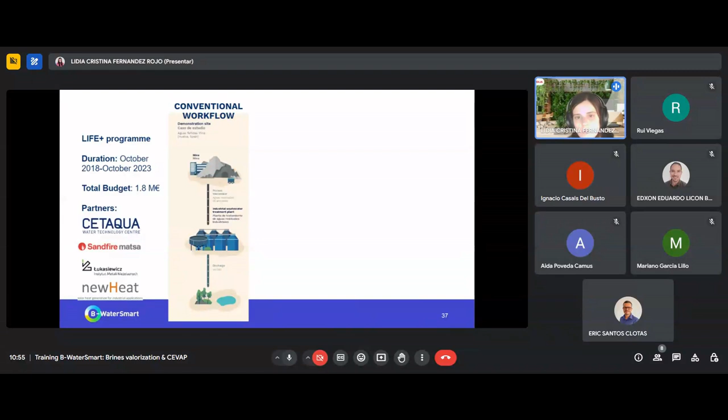With Remine Water, we wanted to change this linear process to a circular process. How? By installing an advanced treatment plant that treated the discharge from the wastewater treatment plant to minimize the brines going to the environment and to recover water to be reintroduced in the production process.

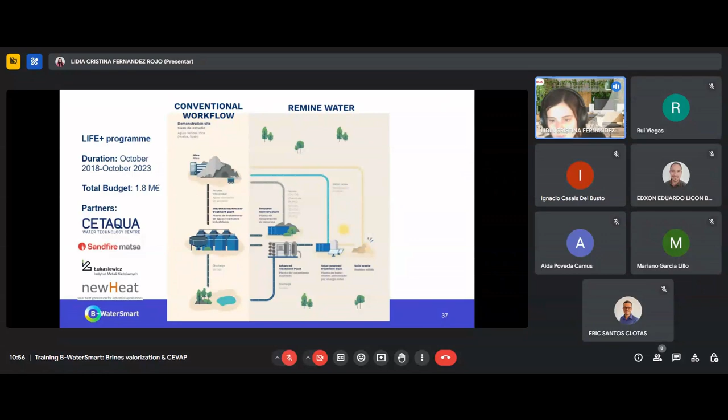In addition, in this project we also constructed another plant called the resource recovery plant, which has the objective of recovering metals and sulfuric acid, also from waste dumps, to be reintroduced into the process. Since this is not devoted to brine minimization, I will not go into detail on this part, but I wanted to mention it just so you know, in case you are interested, that this other part was also developed under this project.

So in the conventional workflow, the MATSA wastewater treatment plant follows this route. First, MATSA treats their acidic water, which had a pH of between 2 and 3, with a high sulfate concentration as well as high chemical oxygen demand amounts. The first step consisted of a Fenton process where the thiosalts were oxidized by means of the addition of hydrogen peroxide.

Then there was a second step where sulfate precipitates by means of lime addition and sodium aluminate. The sulfates here precipitated as gypsum and ettringite. Then the water was treated and stored in a buffer pond before being discharged into the environment.

The point here is that in addition to the high amount of water they were discharging to the environment that was not valorized, there was also the problem of the quality of the water being discharged. In this case, their sulfate concentration was still high, about 1,900 ppm, and in the near future they will have to lower this value down to 900 ppm.

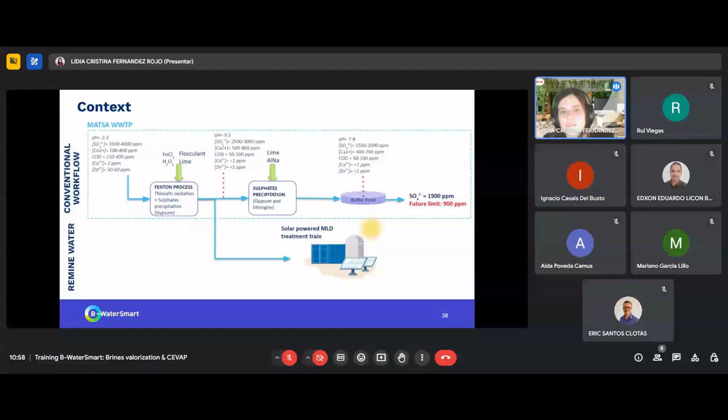So in the project, what we treated is the water that went out of the Fenton process. So it's already neutralized water with a lower amount of chemical oxygen demand, but still high concentrations of sulfates.

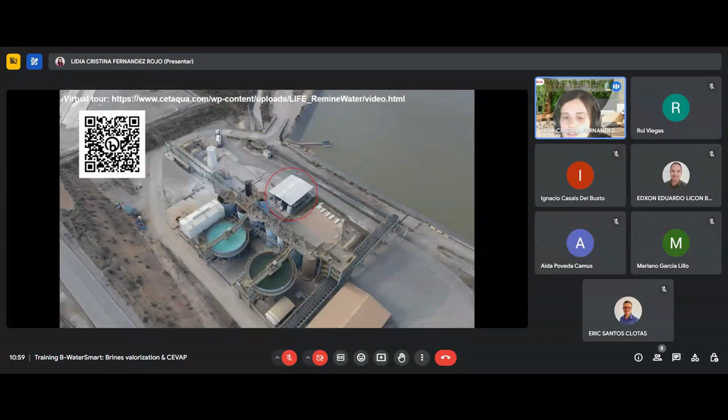Here you can have a full view of the MATSA wastewater treatment plant, and inside the red circle there is the Remine Water pilot plant that was built. If you follow this QR code, you can also have a virtual tour of this plant, available on the Remine Water project website, where you can go into detail on the technologies that have been tested.

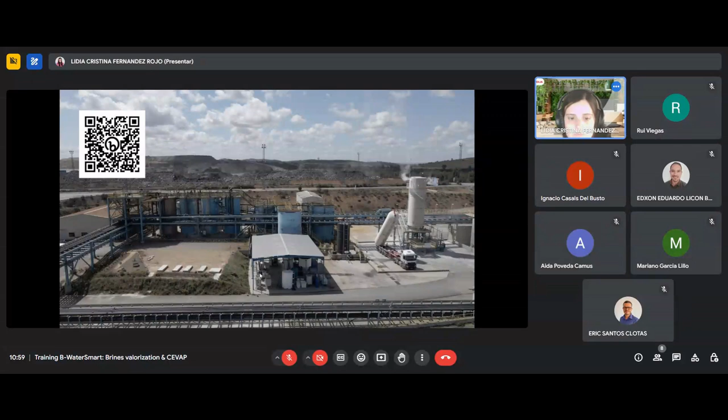This is another view of the pilot site. In the background you can see the waste dumps from the mining, while in the foreground you can see another view of the pilot installation. And here is another closer view where you can see the size of the units that were constructed.

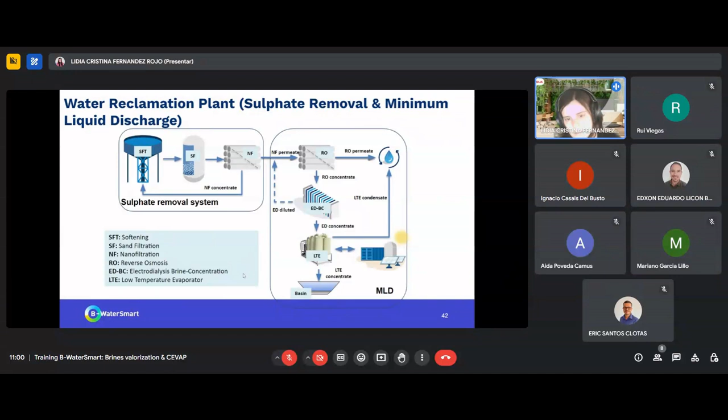So as I explained, in the Remine Water project we built a water reclamation plant that consisted of two different systems. The first one was devoted to sulfate removal, and the second one to the minimum liquid discharge process. Now we will explain the details of each one of these units.

The first part, the softening, had the objective of removing water hardness. For this, we added sodium hydroxide and CO2 to precipitate a mix between calcium carbonate and magnesium hydroxide. With this, we achieved about 70% calcium removal and 60% magnesium removal.

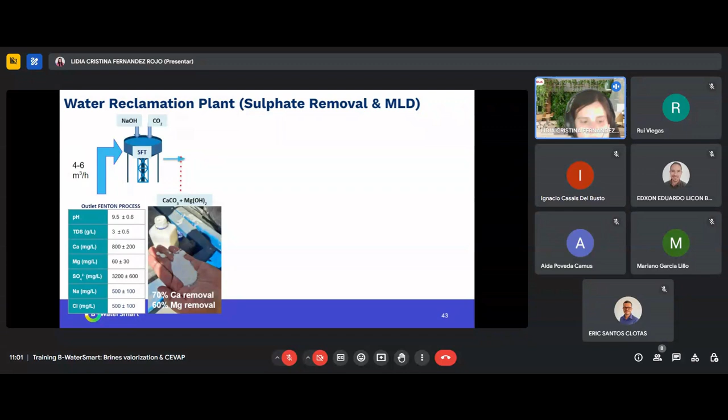At the inlet of the water treatment plant, the flow rate was about 4 to 6 cubic meters per hour. In the next step, the water going out from the softening entered a sand filtration unit which removed particulate matter, and then there was addition of hydrochloric acid to adjust the pH before going to the nanofiltration membranes. Here the objective was to remove the divalent ions.

So from one side, in the concentrate, sulfates were concentrated to about 3,000 milligrams per liter, while in the permeate they were clearly reduced. Working at a percentage of 75% water recovery, 95% of calcium were removed, 95% of sulfate were removed, and about 60% of total dissolved solids were removed.

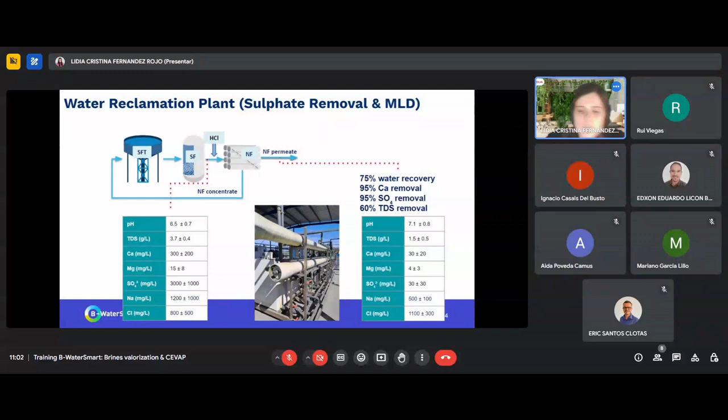Then the nanofiltration permeates went to the reverse osmosis step. Here, again, the objective was to remove monovalent ions from the dissolved phase. These monovalent ions were concentrated in the reverse osmosis concentrate, while in the permeate a high quality water was produced. So in general, 97% of TDS were removed, and almost all the sodium chloride present in water.

The reverse osmosis stage worked with a percentage of 90% water recovery. So from now on, the next steps are devoted to concentrate the brine, minimize its volume, and increase its salinity to prevent discharge and increase water recovery.

So this minimal liquid discharge consisted first on treating the reverse osmosis concentrate through an electrodialysis brine concentration technology. And from here we produce two streams.

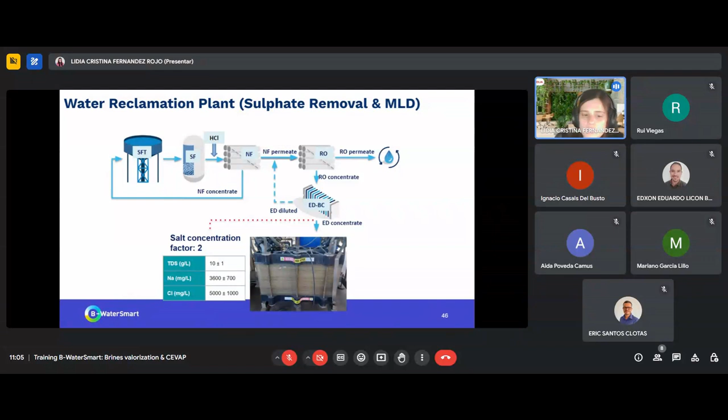In this case, we expected a higher concentration factor in the beginning, but for technical reasons this salt concentration factor could not be optimized. With optimized functioning, it could probably reach a salt concentration factor of about 10 to 20.

Then the electrodialysis concentrate went to the low temperature evaporator, commercially known here as CEVAP. This technology was able to concentrate salts from 10 grams per liter up to 100 grams per liter.

What is interesting here is that this low temperature evaporator was coupled to solar panels that provided thermal energy. So in terms of energy, it was more efficient and had a lower cost than if we had to work with electrical energy from non-renewable sources.

At the same time, the low temperature evaporator produced a condensate that was also of high quality to be reused in the production process of the mine.

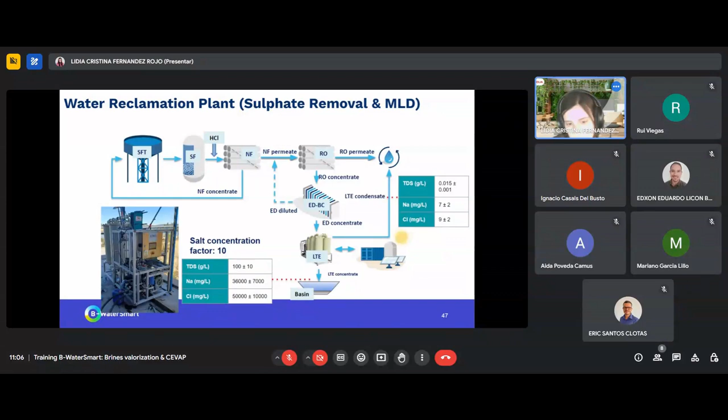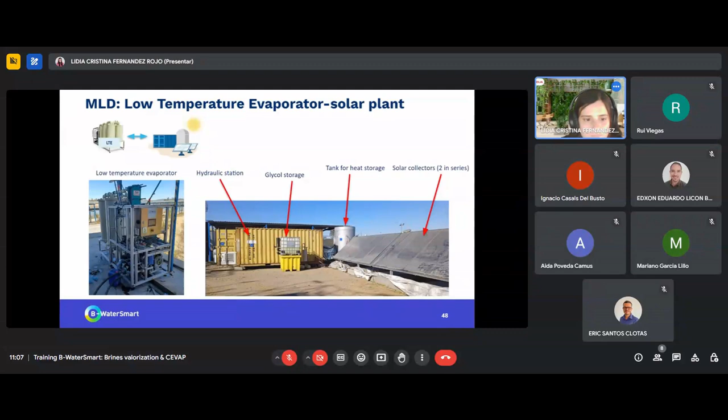The advantage of this technology is that it is more efficient in terms of energy because it profits from the vapor of the previous stage to heat the next one. In addition, it works with vacuum, which implies that the temperature to be applied is lower. So in general, this solution is interesting because it decreases the operational cost of the evaporation to concentrate brines.

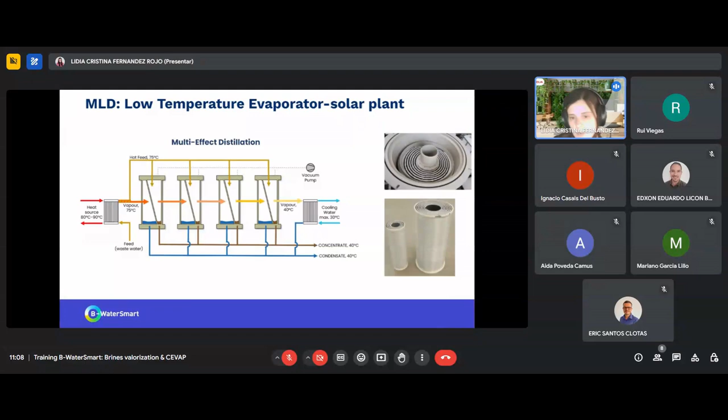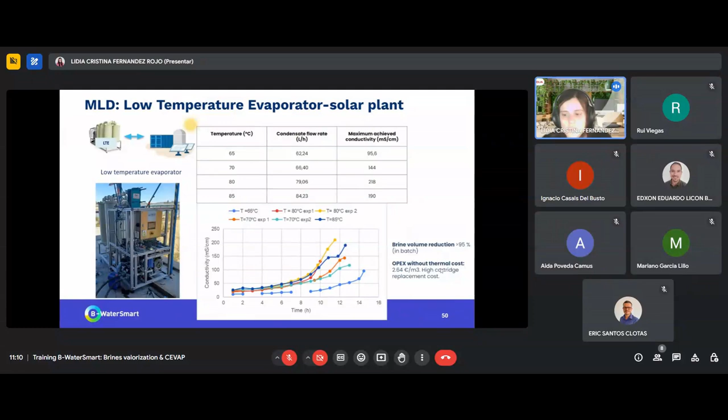As a conclusion from this project, we developed an innovative treatment train for brine minimization that, in a global context regarding the whole water balance, was able to reduce the freshwater consumption that the mine did in the past by 50%. In addition, this water reclamation plant recovered 95% of the water from the reverse osmosis concentrate through the implementation of the minimal liquid discharge that I presented.

And we were able to concentrate the brine from 5 grams per liter TDS in the reverse osmosis concentrate up to 100 grams per liter in the evaporation concentrate.